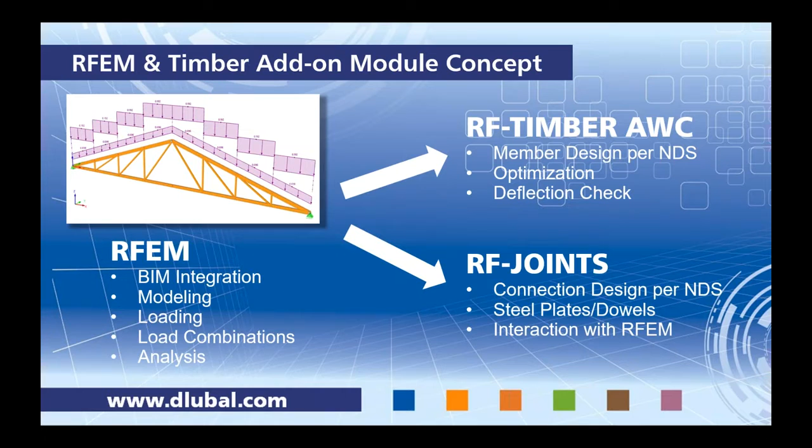The other add-on module, RF Joints, as I mentioned, a new feature was added for the NDS code, both again ASD and LRFD for connection design. It's utilizing steel plates and dowels. And again, I'll show you the interaction that the add-on module can have with RFEM in regards to the actual stiffness properties of a connection and how that affects our internal forces.

So with that said, we can jump directly into the RFEM model. For the sake of time, I did go ahead and create this general truss here, and I am in a 2D environment. So in order to create this truss, I used our structure generator. If we go up to Tools, Generate Model, under Members, you'll notice that we have several options here. A few of them are grayed out, and that's simply because I'm in a 2D environment.

But for this example today, I use the 2D truss option. This dialog pops up. You can see all of the different truss types that we have. We have the option to set our diagonals, different directions, and the rest is pretty self-explanatory. We simply give it the number of bays, the total length. It's a pretty large truss for today, so we set this at 85 feet and the total height at 15 feet.

Then the program asks us to determine the cross sections, to set those cross sections. So for the upper chord and lower chord, I just gave it general glue lam timber members, as well as those specific properties for a glue lam. I can press my little info button here to see the cross-sectional properties, a 6x12 for my upper chord, and for my lower chord, I modeled a 6x10.

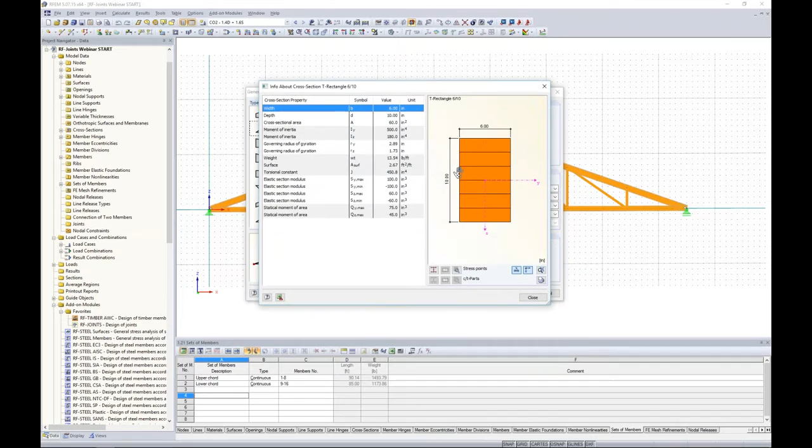For the diagonals and verticals, these are just more post members, 5 inch by 5 inch, Douglas fir larch, so a softwood here. Again, the member properties can be viewed.

Now, the program automatically sets the member type to beam for the upper and lower chords, and you'll notice that the diagonals are set to truss.

For any type of finite element modeling software, we typically have different member types. For our program, beam type is anything that would be a beam or column. A truss would be the same thing as a beam, but we've automatically applied moment end releases to those members. So a truss makes perfect sense for all of our internal members within this truss that we don't want to transfer any moment to our upper and lower chords.

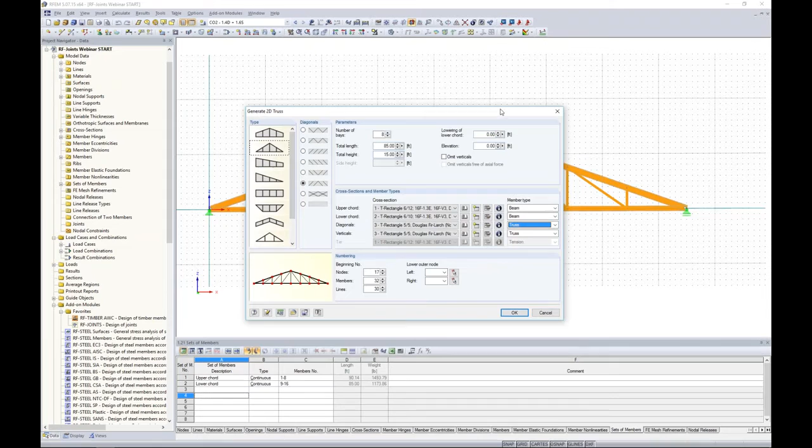So leaving these settings as is for the member type, we press OK, then we'll get the generation of our timber structure here. Then I did add a pin support on my left-hand side and a simple roller support on my right-hand side.

Now, the other thing that we need to take care of is that when I did generate the truss, a fully rigid connection was available at the top of the truss, also on the left and the right.

So you'll notice that I've applied a simple pinned member end release for the top of my truss, just one of the members. You can do so by editing the member, double-clicking it. You'll notice that we have member hinge at the start and member hinge at the end.

I just created a moment release, which you can see here in the two-dimensional direction about the local y-axis. I did so at the beginning of the member on my left-hand side and the end of my member on my right-hand side. So modeling is essentially complete for this simple timber truss.

I did also apply some loads, and I have two load cases. You'll notice in my drop-down box I have dead load and snow load. So my dead load, if I display it, is just a simple member load, 0.08 kips per foot.

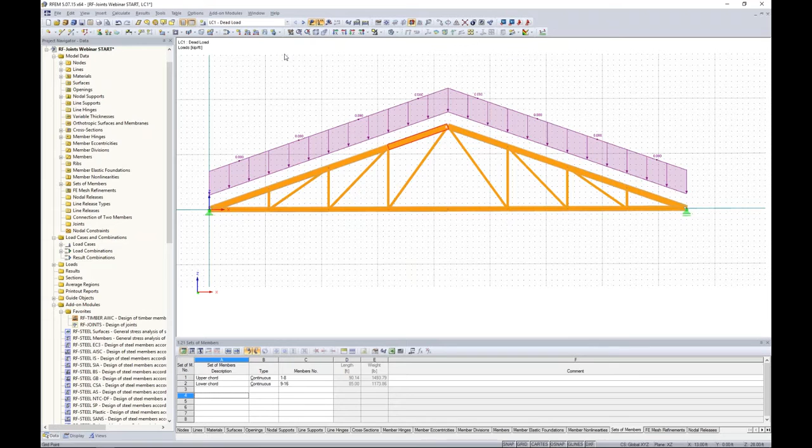The snow load, on the other hand, is 0.12 kips per foot in the projected Z direction. So we're taking into account this member angle and how that load directly applies to these upper chords.

Now I also created a couple of load combinations just manually, and maybe if we enter in the load combinations dialog box we can see this. So we do have the options to automatically create these load combinations, like I mentioned, per ASCE 7 for example.

But for the simplicity of today's example, I created two load combinations. The first could be considered an ASD load combination where my load factors are 1.0 for dead load and snow load. My second load combination is maybe an LRFD load combination where I have applied the load factors of 1.4 and 1.6.

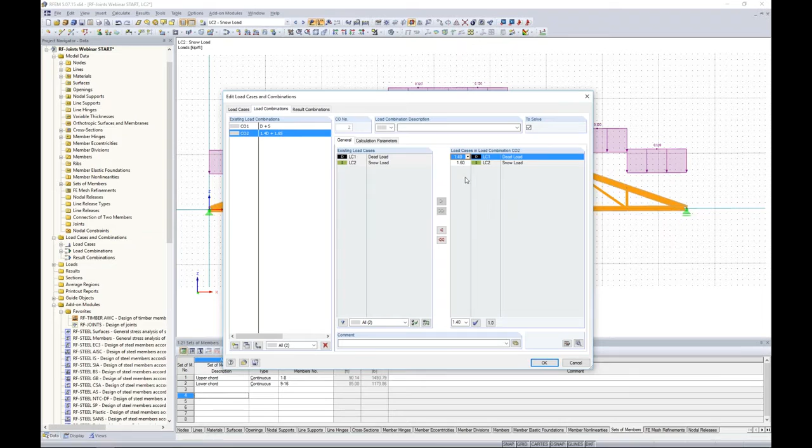You can see in this drop-down box we have quick access to them, or we can overwrite them with whatever load factor we would like.

So now you have the ability to toggle between the load cases and load combinations, and we can run our first analysis. I can go to calculate all, and we'll see within a split second the model will be solved.

So we are still in RFEM. We haven't touched any of the add-on modules yet. So once we run this analysis, in our project navigator over here, we have the results tab available.

And we can, for example, view everything graphically such as global deformations. We can change the display factors here.

What may be a little bit more interesting is to take a look at our member internal forces. Here you can see we have our axial forces. We have some pretty high tension forces on the bottom. We have high compression forces at the top, denoted by the negative magnitude sign here.

Taking a look at shear forces, I can always increase my member diagrams here. And lastly, we have our moments. We should have no moment transfer where I put in those moment hinges, as well as along our diagonals and verticals here. Same thing for support reactions.

These are controlled here graphically within our results in the project navigator dialog box. And you have full control over colors, sizes of fonts just by going to Options, Display Properties.

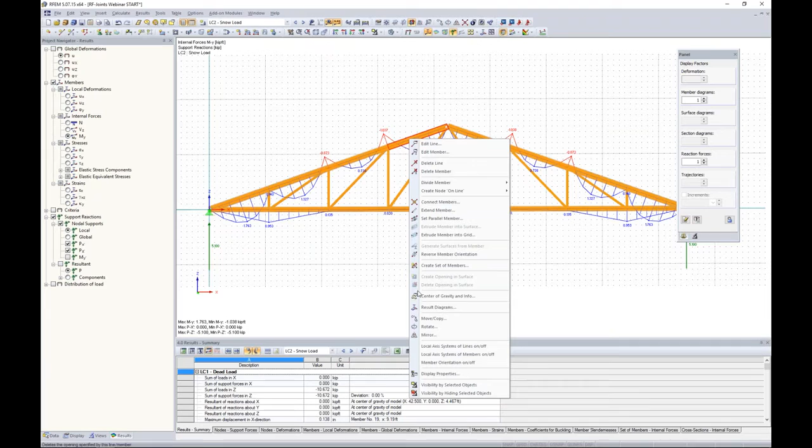Now, this is great graphically, but sometimes we want to see a little bit more information as it relates to the member. So we can always right-click on a specific member and choose Results Diagram.

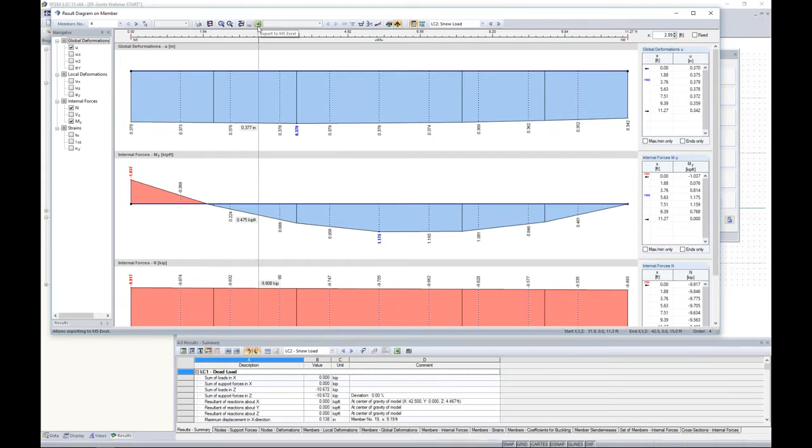Now you'll see the entire member here. We can turn on more graphs such as internal forces, deflections, and get a more realistic view of what's going on along the length of the member. You can print this off directly to a printout report, or export directly to Excel for further sorting. So a lot of powerful capabilities in just viewing our analysis alone.

Now that we have run a full analysis, typically as design engineers we want to move on to code checks. This is where we make the clear distinction that we're going to utilize an add-on module. In the data navigator, you'll see a long list of add-on modules. We work in the add-on module system because we want to cater the software to your needs. Not everybody is going to be doing Chinese steel design, for example, so why should you pay for it? We're trying to cater towards your specific design needs. We also have them organized better with this add-on modules drop-down at the top, according to different materials and applications, dynamic analysis, and things like that.

So for today, we will launch the RF Timber AWC. To begin with, you'll notice we have both ASD and LRFD, so that's nice. Some other software programs for timber design only give you ASD, so you have complete control over which design method you would like to run. Today, we will choose the LRFD.

For the ultimate limit state design, my load combinations and cases were brought in from RFEM, so I don't need to redefine any of that. For ultimate limit state, we'll choose our LRFD load combination, and for serviceability, we will choose our ASD load combination.

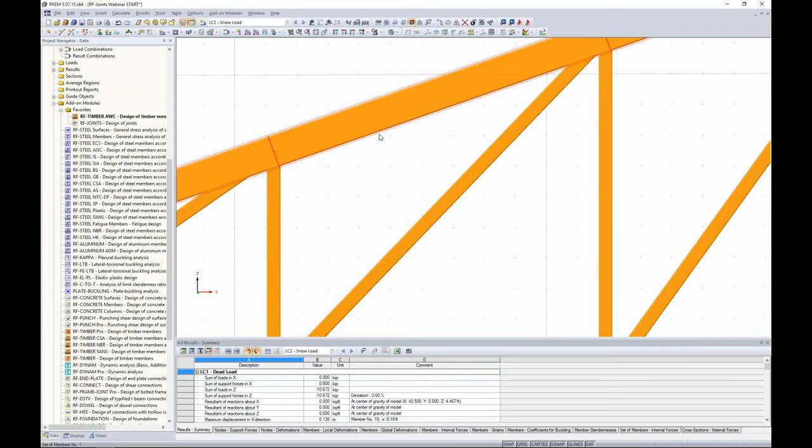I know that's hard for you guys to see, but if you were in the software, you'd be able to hover over that and see it's a set of members. A set of members will essentially be designed like a continuous beam - we don't want to optimize one of these individual members different from its adjacent members. We want to get a code check for this entire bottom chord. That's where sets of members comes into play.

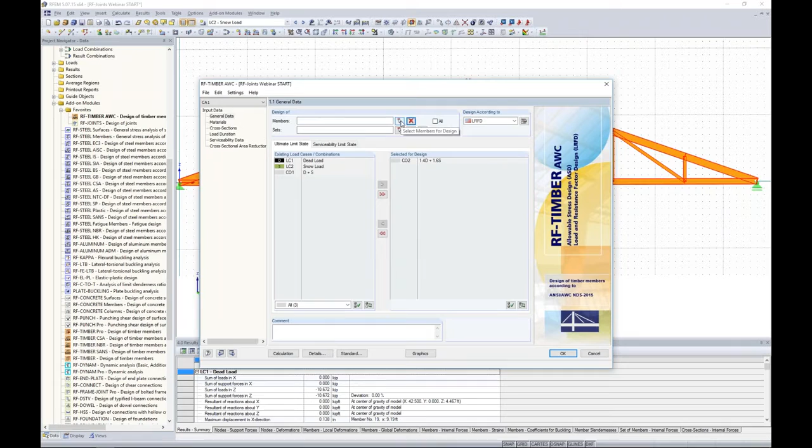Now the default is to select all members. I'm going to clear this, and for my member design, I'll use my selection dialog box, similar to what you'd find in AutoCAD, to select all of my internal diagonals and verticals for my member design. And for my sets of members, I simply choose graphically the upper chord and the lower chord, and click OK. So now we have the distinction between members and sets of members for design purposes.

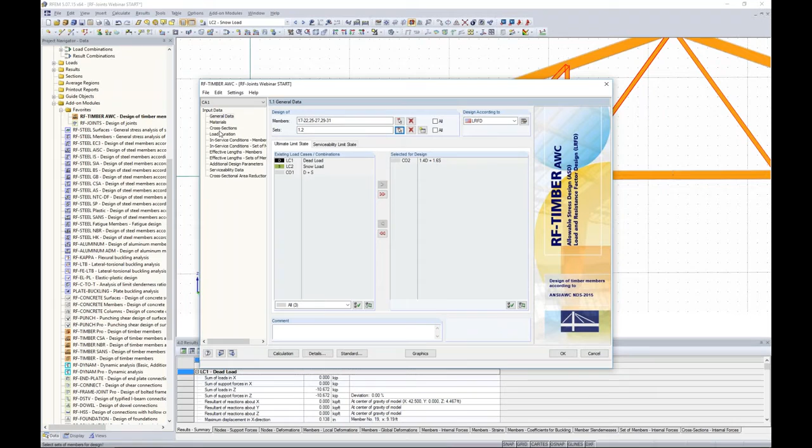Now all I need to do is simply move down the list. Next we will go to materials. Again, everything is brought in from RFEM, so I don't have to redefine my materials, my geometry, my cross sections. All we're doing in this add-on module is giving some further design information related directly to the NDS code.

Now you'll notice we have two bright red materials here, and that's just because when I open up a new model, concrete and steel are defaults within the program. I can delete these back in RFEM if I wanted to, but all the program is telling me is that these are not applicable in the Timber add-on module. That makes sense. But our two materials that we did define to our members back in RFEM are applicable. I can click them and view all of the material properties that will go into the design of this member.

Again, cross-sections, same concept. The member cross-sections are brought in from RFEM. I can view some of the cross-sectional properties here if I'm interested in them.

We can move on to load duration. This is load duration factors. We assign dead load and snow load to the applicable loads that I applied in RFEM. The program is smart enough to know what load duration factors to apply to this.

We can always use our drop-down box to adjust these, but even more so, there is the standards button down at the bottom of the dialog box. It will show you every single factor going into the design process within this add-on module, for example the load duration factors. What's nice is that you can adjust these if you don't fall between 10 years and 2 months, but somewhere in between. That's completely up to you.

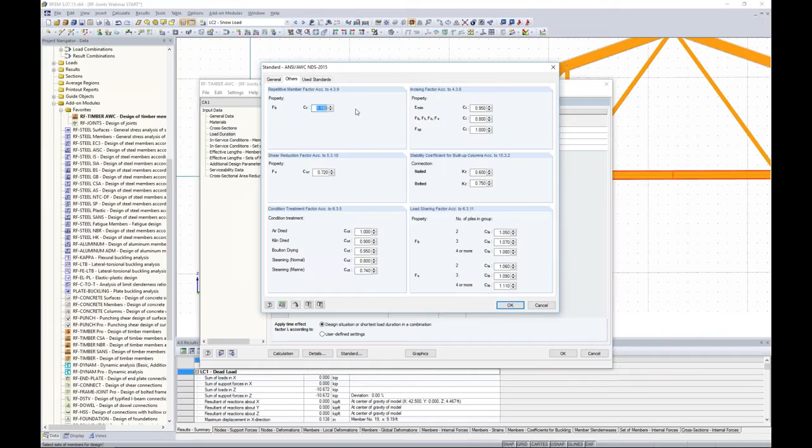Then you'll notice some of the other factors such as temperature factor, wet service factor. If we go to the others tab, repetitive member, shear reduction factors - again this is just all the information from the code. Under used standards, we list which standards are being utilized for the design, and at the end we give you references to these standards as well.

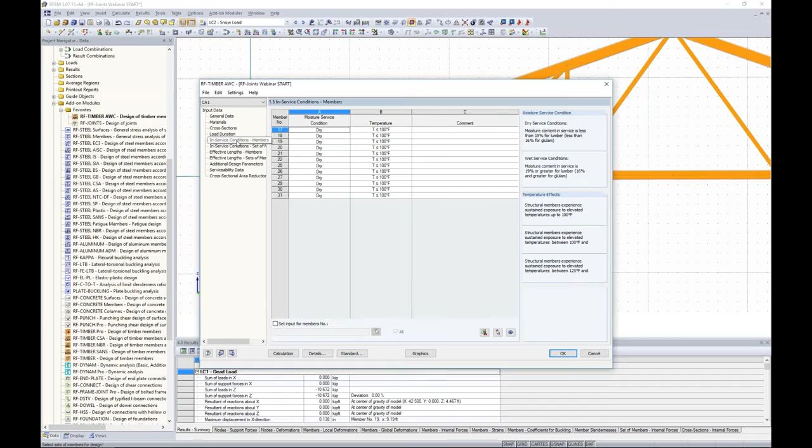Moving down the list to in-service conditions - again this comes from our standards button - moisture service conditions. Are the members dry or wet? Our temperature ranges, we can change these if we'd like.

You'll notice that we have two separate tables for members versus sets of members. This is just so we don't group everything together. I think it's laid out a little nicer when we separate members versus sets of members, and then we can control those factors individually.

Effective lengths for members - this is stability checks. You'll notice we have buckling about the weak axis, buckling about the strong axis, and lateral torsional buckling. I'm going to assume for all my internal diagonals and verticals that buckling about the strong and weak axis, as well as lateral torsional buckling, is a concern. So I'll leave everything as is and let the program determine if this is okay based on my design.

Now the effective lengths here default to the full member length, but you can easily control these lengths by typing it in or graphically using the measuring tool, so you have complete control over this.

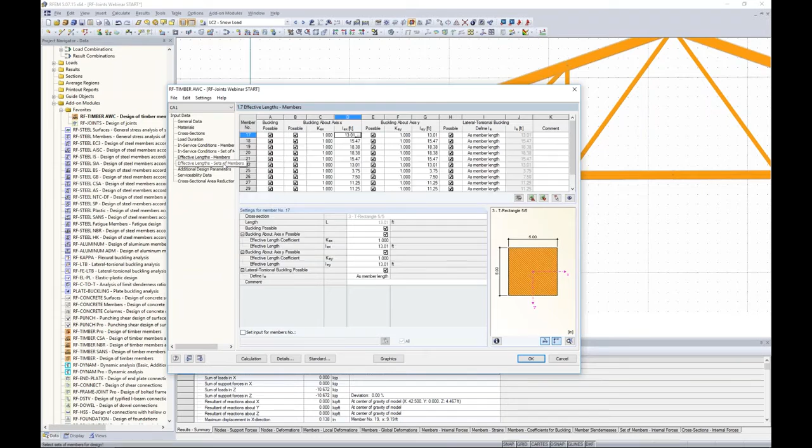Again, our sets of members is on a separate table. For my upper and lower chord, I'm going to assume I have complete lateral bracing along the length of the member. So weak axis buckling about the local x-axis, which I have my axes shown down here, is not a concern to me. And it would be the same for my lateral torsional buckling - this is not a concern based on my connections or lateral bracings.

All I have to do is simply uncheck the possible buckling about the y-axis or strong axis - I am still concerned with this, but right now it's set to the full member length, the full set of member length. So it's pretty large, 90 feet and 85 feet.

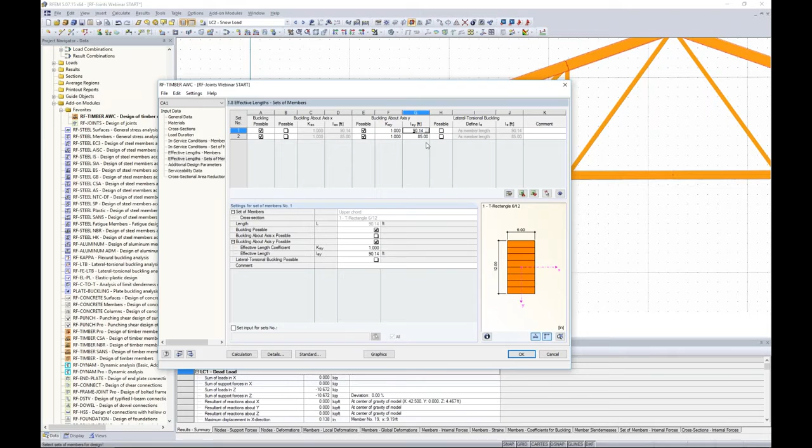Maybe for uplift wind purposes, I have much smaller unbraced lengths here - for example the upper might be 3 feet and the lower might be 3.5 feet. So as a design engineer, you always want to pay careful attention to your unbraced lengths because this significantly affects our stability design.

Moving on to additional design parameters - this is just shear reduction factors, edge bonded. This refers to our glulam members for our upper and lower chord members. We have the code references here, and again the standards button will tell you what those factors are.

If we scroll down a little further, here's our incising factors and repetitive factors for our post or brace members within the truss.

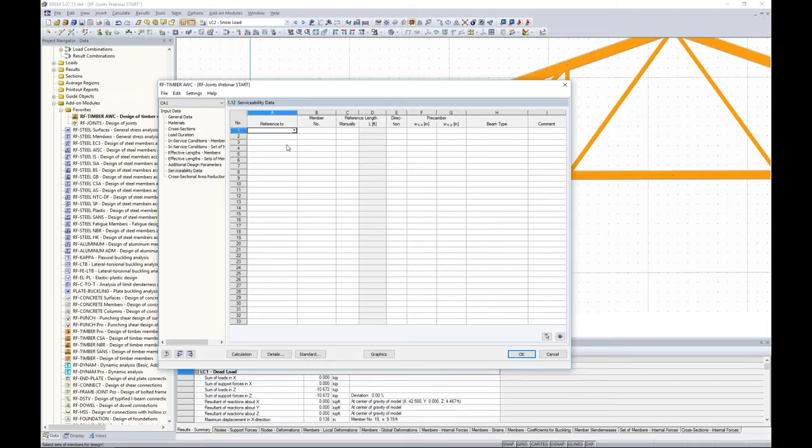We can move on down to the serviceability data - here is just deflection checks. We can check every single member in our model, or maybe we're only concerned with checking a couple of members. For this example, I'll graphically choose perhaps one of my diagonals that I want to check deflections for. I click OK. The manual reference length is set to the full length of the member.

That's fine. Do I have a pre-camber? If so, I could put this in here. And lastly, I need to specify if this is a beam or cantilever. Now I can do the same thing with a set of members - maybe I'm interested in my bottom chord deflection.

All I need to do is graphically select my bottom chord here. The full reference length is set at 85 feet, and again we just use the beam type beam.

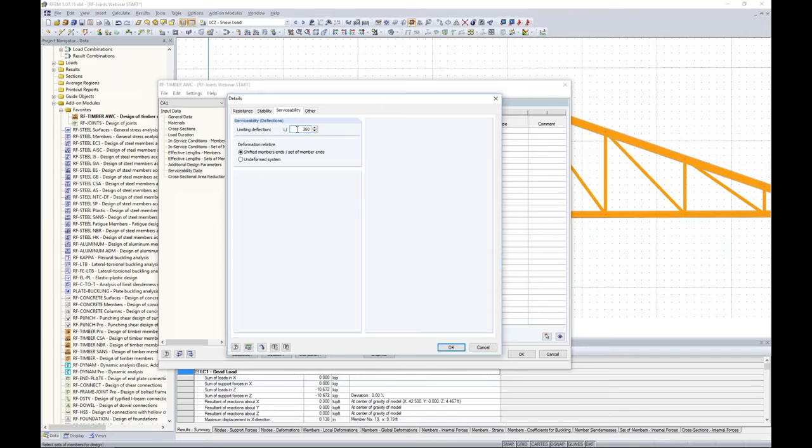Now the question is, what deflection ratios am I comparing this to? Where can I control that? Under the Details tab under Serviceability, here's my limiting deflection ratio. You can see the default is set at L/360. For cantilevers, it will always use half of this ratio that you set here. Then you need to specify whether the deformation is relative to the shifted member ends or the undeformed system, also known as relative versus absolute deformation. So this is where we can control this limiting deflection ratio and change it if we'd like.

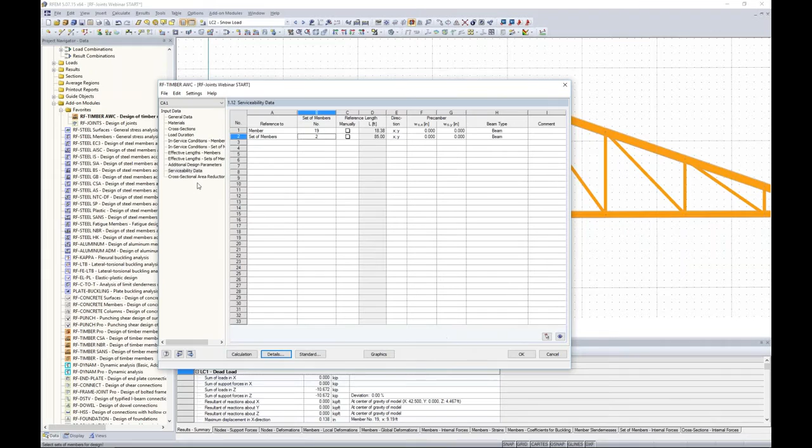Lastly, we can move on to the cross-sectional area reduction. This is if we have a notch within our member, maybe at the member connection at the ends, or maybe the member is sitting on top of a wall or another member, and we have to take this cross-sectional notch out. We can easily account for this by selecting the member graphically, and then giving the notch location, whether that's the start, the end, or within the inner span. Then we give the notch the geometry, and the program will automatically account for that cross-sectional area reduction. It's smart enough to only compare those internal forces at this notch location for design purposes, meaning we don't have to reduce the entire cross-section of our member and get an over-conservative design. Just a nice little additional feature if you have this scenario.

For our case, we won't do that today. Now, before running the calculation, I want to quickly run through the rest of the details tabs, to see exactly what is going on behind the scenes with some of these other options.

The first one under resistance is consideration of connections, the reduction of limit tension stresses. If I check this, what this means is that occasionally we have the weakening of a cross-section at a connection. So I can check this checkbox, select a node, and give the connection length, maybe 6 inches, maybe 1 foot, and I can reduce the stress ratio inside that connection. You can see the default is set to 60% here, and the stress ratio outside the connection can be kept to 100%. So now when we're looking at our design, the program will flag you if at that particular node you're exceeding that 60% stress ratio. Just an easy way to take into account the weakening at a particular connection of your cross sections.

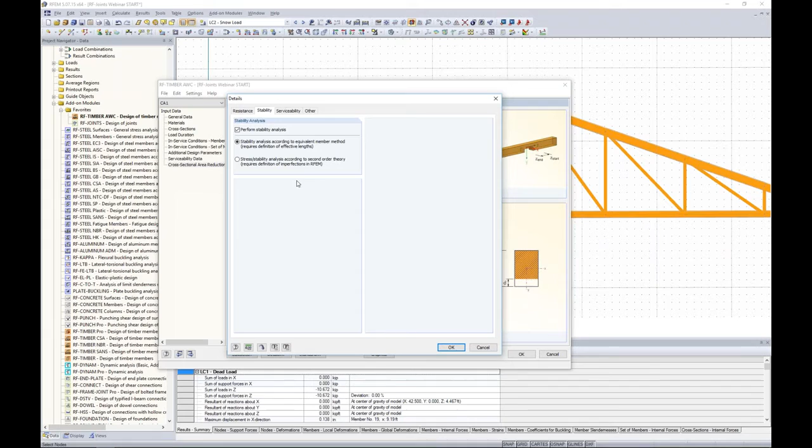And what we're doing is a stability analysis according to the equivalent member method. With the equivalent member method, the NDS says to take into account secondary effects within the design phase for our structure. Now this is very different than something like steel, for example. Steel tells us to take into account secondary effects in the analysis section, so things like P delta, stiffness reductions, notional loads are all taken into account in RFEM, the analysis side. But again, timber's a little bit different in that we have these factors added to our bending capacities, for example.

So with that said, back in RFEM, if I open up my load combinations, you'll notice that under calculation parameters, it is always default in the program to run a second order analysis for our load combinations. This will take into account P big delta and P little delta.

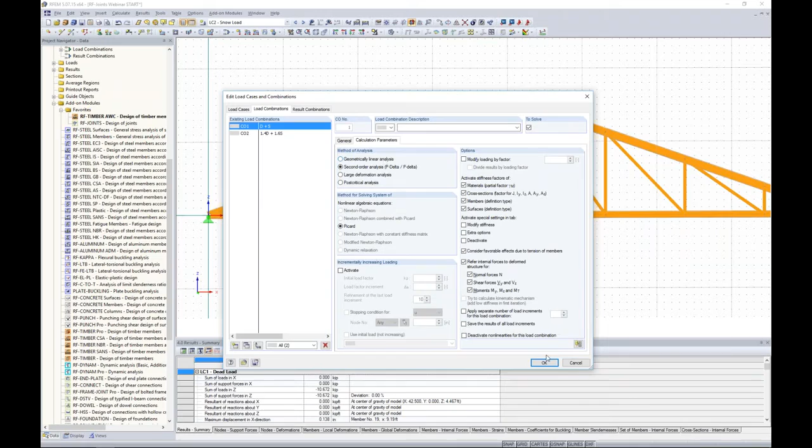So perhaps you have an existing structure, or you're just really close on your design checks and you don't want to increase your member sizes. Technically, you can go back into RFEM, change this to a geometrically linear analysis, and then you can take into account these second order effects within the add-on module only, so the design part of it. Now, it is typical for most engineers just to leave on P delta analysis in RFEM. Therefore, your internal forces are a little bit higher, but it's just a more conservative route to take.

Now, the other option within here is stress stability analysis according to second order theory. It requires definition of imperfections in RFEM. If I were to check this, what I'm doing is telling the program that under the effective lengths, the buckling for strong and weak axis, I'll take that into account with the analysis—maybe with stiffness reductions or with those notional loads, imperfections, things like that. With lateral torsional buckling, there is no way to take that into account with the analysis side, so I'd like to still do a check with that within the design side.

Regardless, today we will stick with the default of checking our strong and weak axis buckling. Serviceability we've already been through, and on the other tab, cross-section optimization: design ratios are maybe more around 0.8, possibly 0.9—it's typically not 1.0. So for optimization for your members, which I'll show you in just a second, you can change this to 0.8, for example, for design purposes.

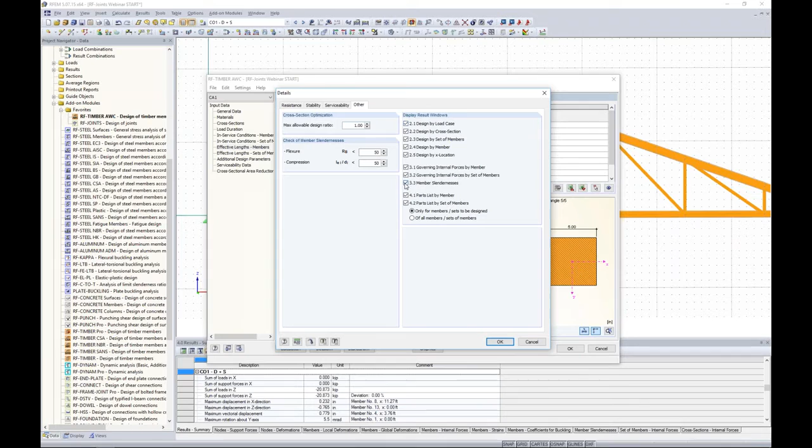Check of member slenderness: if member slenderness is a concern, here are the ratios that we have set according to the code for flexure members and compression members. You will need to activate 3.3 member slenderness right here for our result windows if you are wanting to check for member slenderness. So that's pretty much the concept for all of the input data, and now we're ready to run our first calculation.

You can see that it solves within a quick second. All it's doing is bringing the internal forces into this add-on module from RFEM, and we apply the NDS code for our design. Now we have our results tables available, and we can view the design by load case.

We can view design by cross-section—we have 3 different cross-sections here. Maybe we want to view design by the sets of members or by each individual member. Now, what's also great is that as I'm clicking through these tables, you'll notice that it is synced to the graphics view in RFEM. Even the X location of my controlling internal forces line up with my tables here.

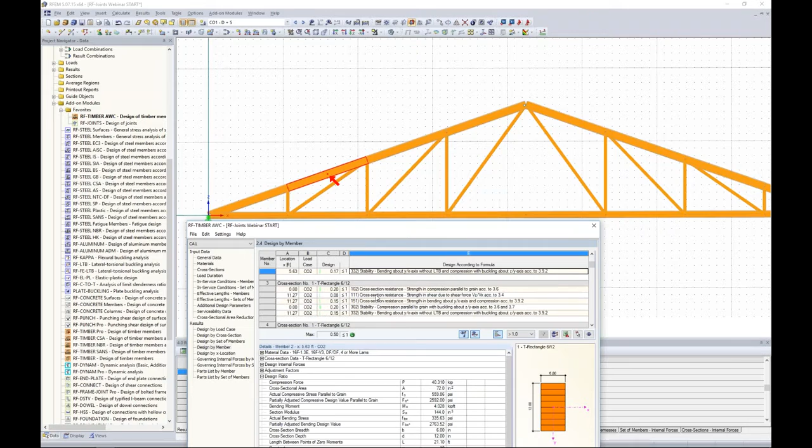And something else that I really pride ourselves on, because I know this isn't available in a lot of other software, is that we give you the code check for everything within the NDS. So we're not just giving you the controlling code check for each member, but you can actually scroll through and view the different checks individually. Even more so, we give you all of the variables that go into that code check, as well as the equation references. So if you have the NDS code right in front of you, here's the equation for your C sub P factor—you can quickly flip to it and understand where those numbers are coming from. So again, a very powerful feature.

Now you can always export directly to Excel to do some further sorting, and as you can see, we have this nice big green smiley face because our design check is only at 0.5. So looks like we're doing quite well with our design. We can also view some of the governing internal forces by member if you are interested in that.

And lastly, we have a parts list by member or a material takeoff. So as far as optimization goes, let's quickly go back to our cross sections table, where you'll notice that the max design ratio for each cross-section is given.

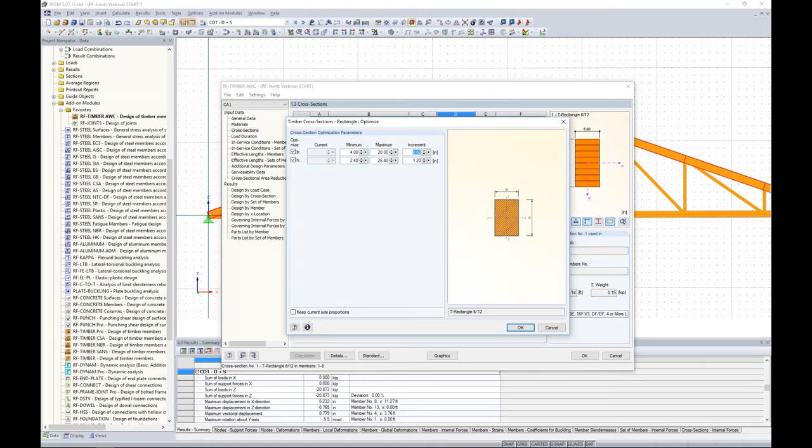I think we can see that our top chord is pretty low, 0.22, so maybe this isn't an ideal cross-section, and rather we'd like to optimize to something more like 0.8. We control that 0.8 under our details setting, where we can choose the option to optimize. When I click yes, I just need to give the program some dimension ranges for both my depth and my height, like maybe 4 inches to 20 inches with an increment of 0.5 inches. Then we can rerun the calculation, the program will optimize, and we can continue on using these new section sizes.

For connection purposes, I'm not going to do this, so we'll just stick with the design that we're given.

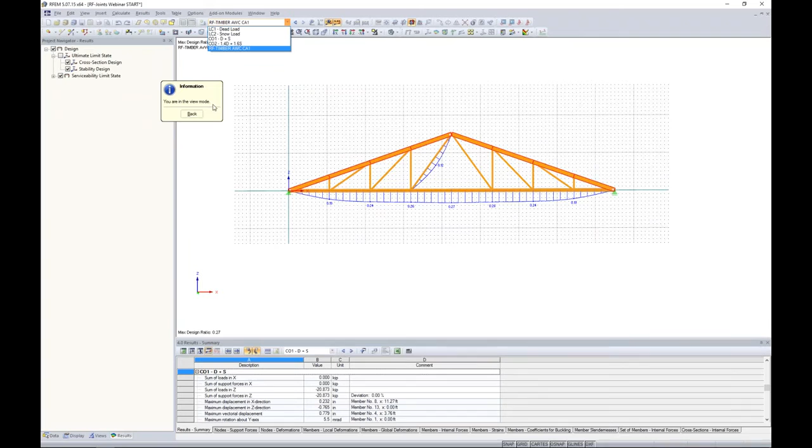Lastly, we can view everything graphically. We're back in RFEM, but we're still technically in the add-on module, which you can see from the drop-down box and this little dialog box here—we're still in RF Timber AWC. So I can view my ultimate limit state designs graphically, and I can turn on my panel, well below 1.0, and we can print these off. Serviceability we can take a look at as well. Remember, we only check serviceability deflections for our set of members down at the bottom and one single member here. So graphically, we can view everything rather than just the tables.

So that basically sums up the member design. And the next thing that we want to move on to is connection design.

So I can go back to my data tab, and I have my other add-on module here, RF Joints, and I will launch that. Again, just another simple dialog box, which is the add-on module, taking in all the internal forces into this add-on module. We just need to further specify some information.

You'll notice that we do have steel and timber. Unfortunately, at the moment, steel is only per Eurocode design, but at some point in the future we do plan to add AISC as well as CSA steel connections. But what is exciting is that we did add the NDS 2015 for our timber connections. You can see we have both ASD and LRFD available. Maybe to just continue on from our member design, we will stick with LRFD design. We have steel to timber connections.

Now for the joint categories, we either have general dowels we can choose from, or you can also see that we have bolts. For today, we will be going with general dowels. Now, there are 3 different joint types. We have the first joint type, which is main member only—maybe you have the cantilever of a beam from a wall, for example. That would be applicable for this type of connection.

The second connection type would be with a continuous member and a second member framing in—something more like this connection here where we have our continuous upper chord and a vertical member framing into that continuous member. And lastly, we have without continuous member. So at this particular connection joint, we don't have any continuous members that we're wanting to define. This is what we'll be continuing on with today.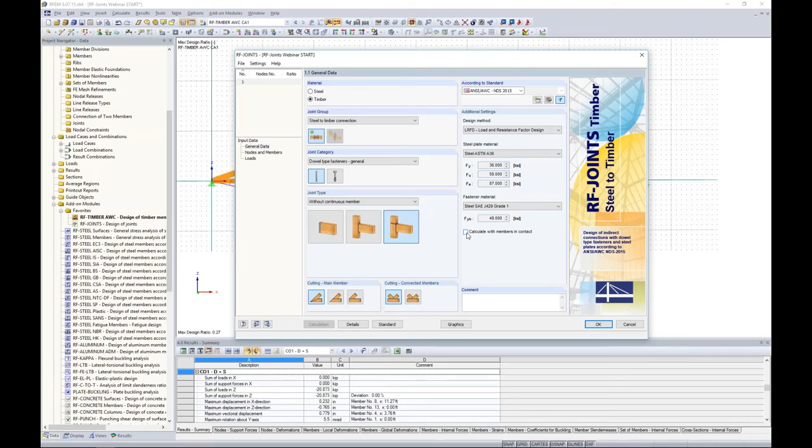We don't give you design for these members in contact, but it's just an additional check to notify you if we do have some extremely high pressures from one member to another. Again, we just simply work down our list here.

We'll move on to nodes and members. In our graphics view you will see our truss, brought in from RFEM, and nothing's highlighted right now since we haven't selected any nodes. This is import from the structural model, or we can set manually here. If we choose set manually, this allows us to define any type of connection we want, including materials, cross sections, and different angles, so we don't have to use what we modeled in RFEM.

For today, it makes more sense to import what we've already modeled in RFEM, so we can do further connection design here. The first thing I want to do is choose my nodes for my first connection. I'm going to choose node number 1 on my left and node number 2 on my right. These will be identical connection designs, so we'll use those.

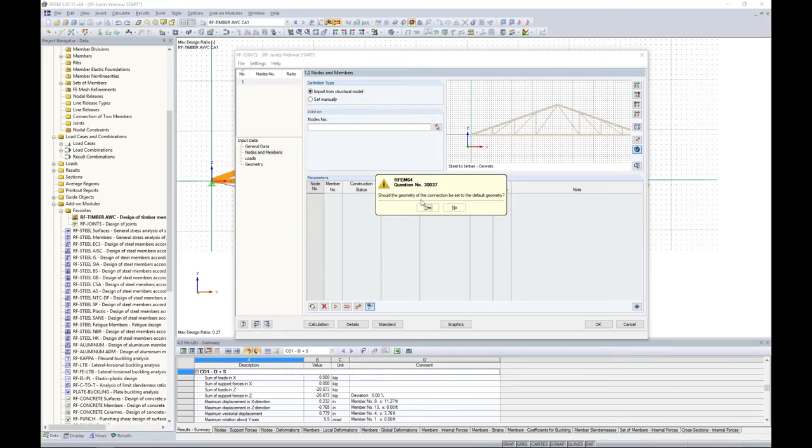Should the geometry of the connections be set to the default geometry? Yes, I want to bring in what RFEM already has modeled. Now you can see I can zoom in here and my members are highlighted at that particular connection. At node number 1, the program automatically assigned the connected member to member number 1. If I use my drop down, I have connected member, main member, inactive. Member number 9 at the bottom is set to the main member. My materials and cross sections were automatically brought in from RFEM, and even my angles were automatically determined, so I don't have to worry about redefining that information.

Quickly jumping to geometry, our picture of our connection will be populated here, and I think we're all in agreement that this is not the ideal connection. Nobody would cut these two members right down the middle and create a connection looking like this. So how do we change this?

Back on the General Data tab, this is where the cutting of the main member and connected members are affected. I'm going to change this to the second option, which you can see here graphically. Jumping back to my geometry tab, this is looking a little bit better. But ideally, all of these internal forces from our upper chord are going to be bearing down on our bottom chord. Timber is not very strong when we're considering these internal forces bearing down here, so I want to flip-flop these, so to speak.

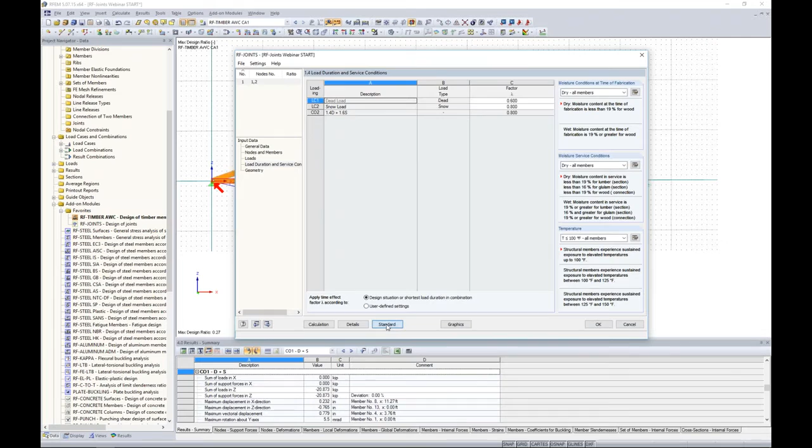Again, if we pop open this standard, here is where we can see all of the different factors that are applied for the connection design. We can scroll through these. Everything's coming directly from the NDS code.

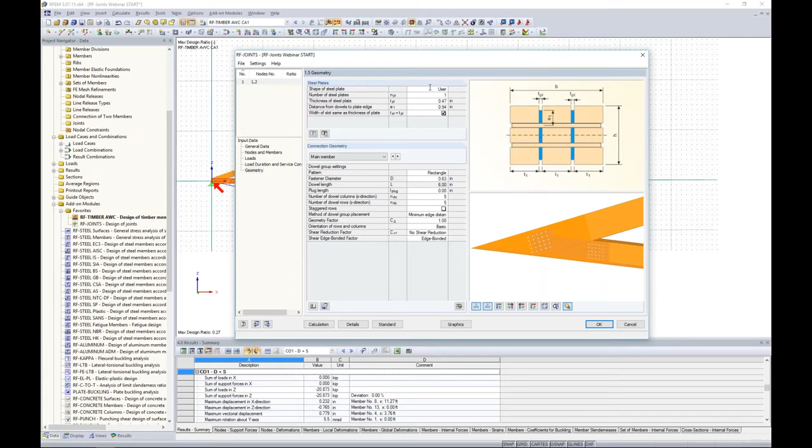Lastly, moving on to geometry. This is probably the most important, because here is where we are going to define our dowel layout and our steel plate layout. It's pretty self-explanatory. All I need to do is work from top to bottom, filling out each variable here. The shape of the steel plate, the first option is user-defined, which you can see is basic, just rectangular sections at my upper chord and my lower chord.

The second option is convex hull. What the program will do is make the best attempt it can to simply connect these two rectangles with a straight line. So maybe this is something a little bit more similar to what we'd see actually fabricated. So that's an option if you'd like.

The third option is rectangle. You can see this is not ideal for our connection today, but this could be ideal for another scenario. We'll just stick with this user-defined connection for now.

Now, the number of steel plates can vary anywhere between 1 and 5 steel plates. For the first run, we'll stick with 1 steel plate. We do need to give the thickness of the plate. We'll set that to 0.5 inches.

Now the distance from the dowels to the plate edge, E1, we do our best to give you all of these variables graphically as well, so you can understand exactly what information you're entering here. So for that edge distance, we will set that at 1.2.

Now, is the width of the slot the same as the thickness of the plate? Well, if this was not, then I could specify the slot thickness different from the thickness of the plate if I'd like. Moving on to the connection geometry, you can see that we have the main member here, or we have connected members.

So we first want to start with our main member. The pattern will always be rectangular. The fastener diameter, which we can change our viewport here and zoom in to see exactly what we're setting in terms of our dowel layout, we will set our fastener diameter to 0.5 inches.

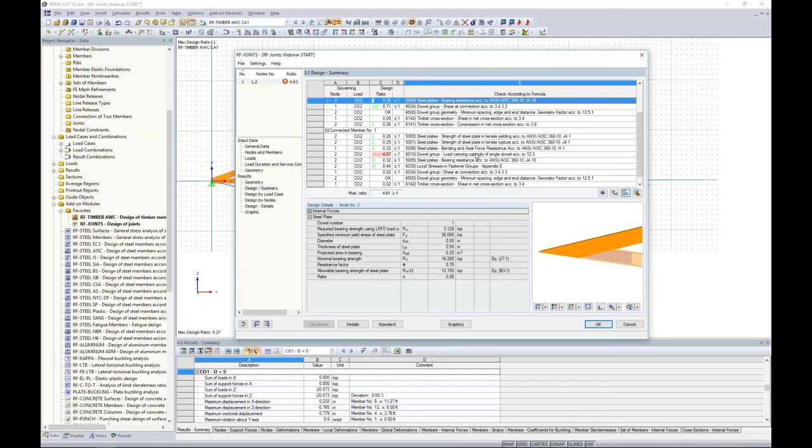Scrolling down to my connected member, I obviously have a huge problem here as well. My load carrying capacity of a single dowel is exceeded.

So before checking out the rest of the results, let's go back to our geometry and make some changes here. Maybe the first change I'd like to make is adding an extra steel plate. It's asking me if I want to delete my results.

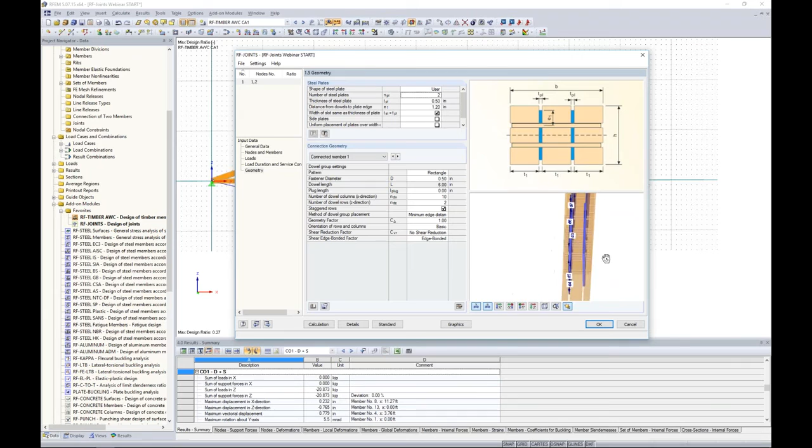Yes, this is fine. Now I can rotate this view around, and you can see that these steel plates are shown here graphically quite nicely. It's a nice rendered view where we can actually see what's going on.

Now, there are a few other settings that came up with adding 2 steel plates. For example, we can set these as side plates if we wanted. So rather than be embedded within the glulam members, you can see now they are side plates. For us, we will uncheck this option. The third option is uniform placement of plates over the width, which you can see from this cross section here. If I uncheck this, then I can set my distance between the plates, T2, here in the center.

Maybe I want something more like 2 inches, so you have control over that. It doesn't necessarily need to be the same width for all 3 dimensions.

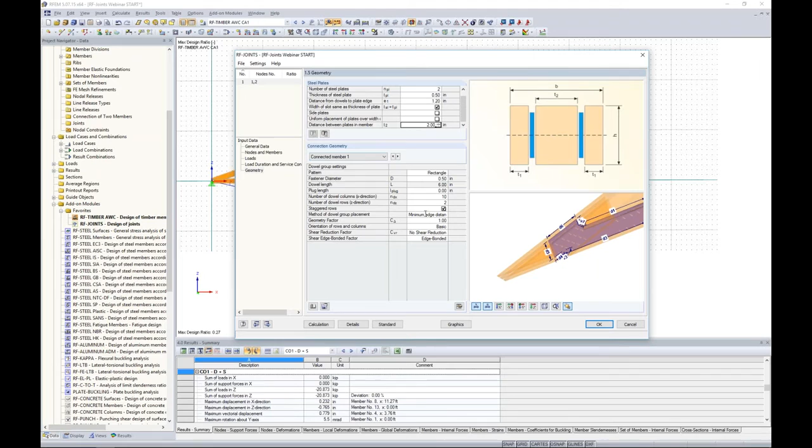Looking at our connected member number 1, I'm going to leave most of this as is except for the method of dowel group placement. Sorry, I want to switch this over to the main member first of all, so we'll scroll in here to our main member.

Now, instead of the minimum edge distance, I'm going to choose a user-defined setting here. So the distance between dowel columns, which you can see everything is shown graphically here for what numbers I'm entering for my variables, perhaps the distance between the dowel columns, we'll set this at 5 inches.

The distance between the rows, we can change this to 2.5 inches. And the distance from the loaded end to the dowel, A3, which you can see here, we will set this to 6 inches.

Eccentricity, if you want to move this connection up or down, you can do so as well with the generation of this eccentricity setting. Now, everything else will leave the same for this main member.

Connected member number 1, remember we're extremely overstressed here. There were pretty high tension forces on this lower chord. So maybe I want to space out these dowels a little bit more to get a little bit more capacity down here at the bottom.

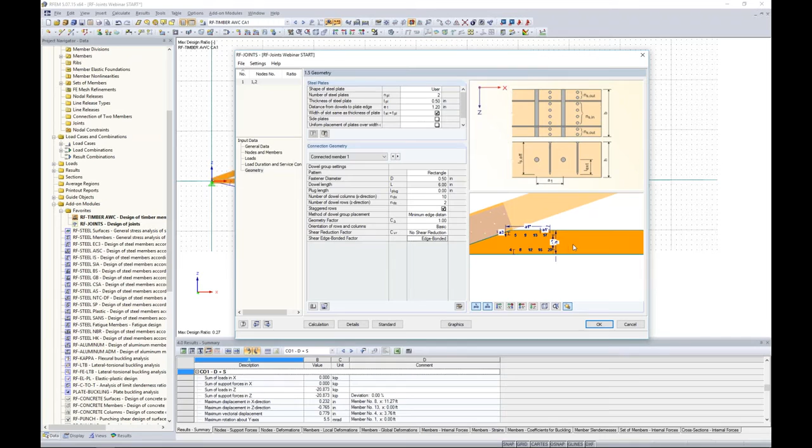Now we did add a second steel plate, so that will help us as well. So instead of the minimum edge distance, I'm going to use these user-defined settings as well. My distance A1 between my dowel columns, I'll set this now to 5.0. And the distance between rows will be 6.0, and the distance to the edge, A3, will now be 6.0 as well.

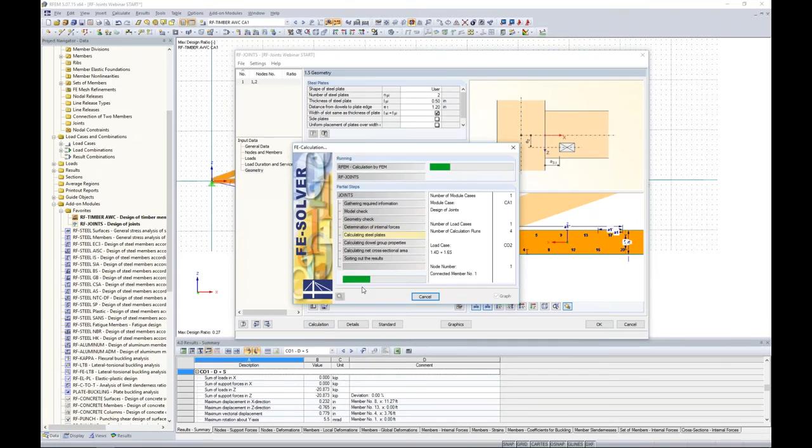No eccentricities. So now that I've made these slight adjustments, we can quickly rerun the calculation with this new geometry to take a look at our results. It looks like we're still slightly overstressed, 1.23. Well, at least we're doing a lot better than the 4 point whatever it was code check from before.

So we're almost there. If I scroll down to my connected member, I'm now at 0.8, my controlling code check here for my load carrying capacity. That's great for design purposes, so I think we're done with that connected member.

But we still want to go back and address the main member quickly. Maybe I don't want to add any additional dowel rows or columns, I'm content with the size of my dowels. So what I can do is simply uncheck my staggered setting.

It's asking if I want to delete my results. Yes, that's fine. So now instead of staggered rows, you'll see that I have a true 8 columns and 4 rows, and so we have a few additional dowels added to this connection.

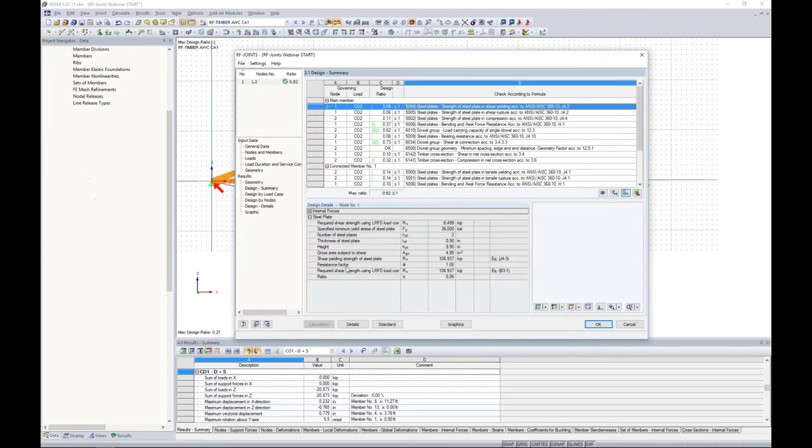We'll run the calculation again, and I think that we'll see now our controlling code check is 0.82. So that is good for design purposes.

So now taking a look at some of the other design tables that we have, designed by load case. We only have one load combination we're solving for, designed by the 2 nodes, node 1 or node 2.

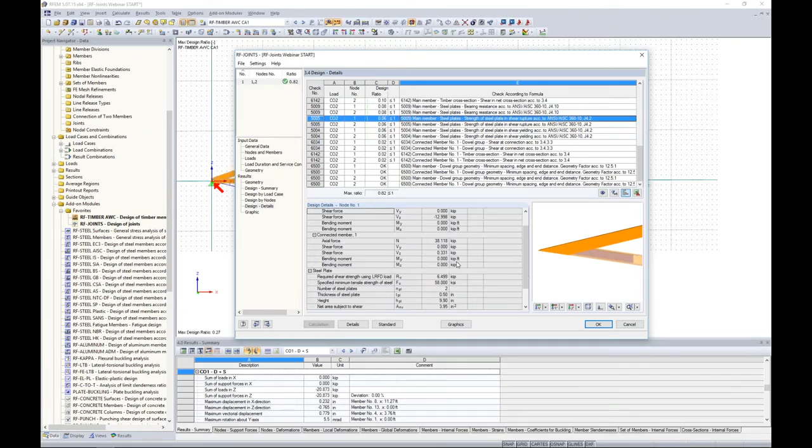Maybe the most user-friendly table would be this design details. Here you can see that the ratio checks are set in descending order from the most controlling to the least controlling, but we also have the checks for minimum edge distances and dowel spacings. Again, everything is as transparent as possible with the code equations and references. Even the internal forces that we're designing for at that particular location are listed.

Our geometry here is just the geometry of the plates. Most of this was in user input, but things like the slip modulus for one fastener, given the slip modulus for the connections, things like that.

Now, our last graphic here is pretty powerful as well. Obviously, we're not a program that's going to give you shop drawings or fabrication drawings for these steel plates, but what we can do is provide you a quick link to create a DXF file for this connection. So you might want to be doing additional drawings in AutoCAD, for example. At the click of a button, you can create that DXF file if you would like to. So again, a pretty powerful feature here for our connection layout.

So that sums up the first connection design, and real quickly we can go to graphics, and the program will automatically bring that connection back into RFEM for the graphic view. We can even rotate our member around and see the dowels and the steel plates in there. So in terms of actual rendering, everything is shown there.

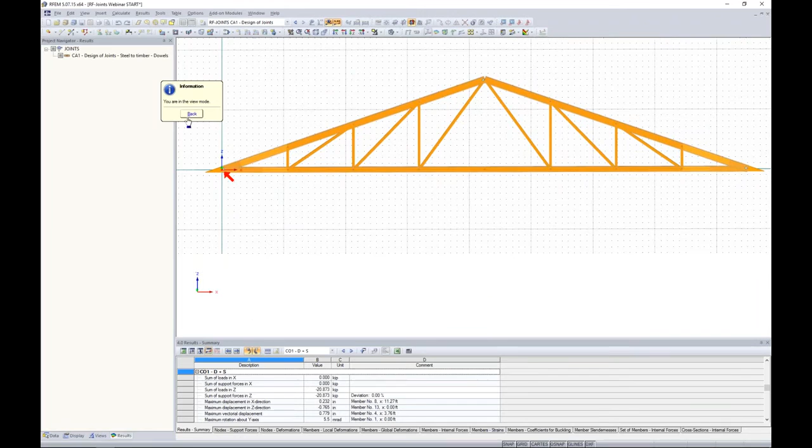Going back to the add-on module, I'm going to do a second connection design pretty quick. So we'll just create a new case here. You can rename it if you'd like. Again, just jumping through some of this user input entry that we've already been through, we'll create without a continuous member. We are doing LRFD design, and everything else we can keep as is.

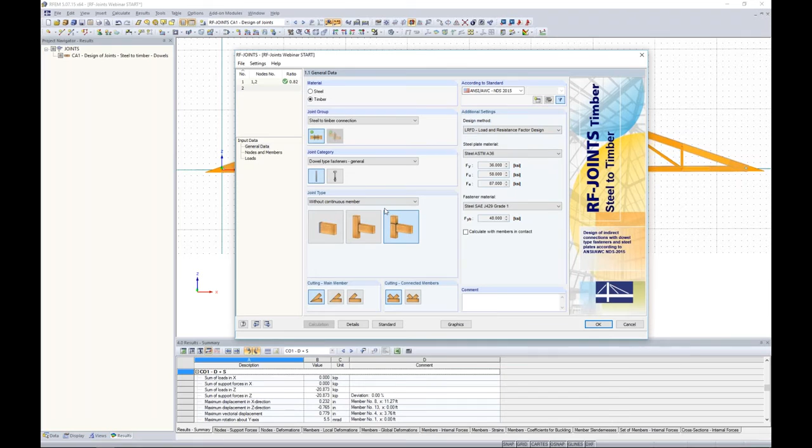The nodes and members for this connection, I'm going to choose the top of my truss, and I click OK. Should the geometry be brought in from RFEM? Yes. Now you can see that we have 4 members for this connection design.

The program automatically assigned the connected members and the main member to the individual members that it brought in from RFEM. So how do we think this connection will look with how the program assigned it? For this, we jump back to our geometry tab and take a look at our connection, and I think we can all agree that this is a pretty big mess. This is certainly not what would be ever created by the contractor, for example.

So we can adjust this back under our nodes and members, and the main member right now is set to this brace. Instead, I'm going to set the main member to my upper chord. Now my brace, I'm going to change this to connected member, and the program has automatically rearranged all of this. We'll jump back to our geometry, and this connection looks much better.

One quick note about this: when you have multiple members, you'll notice that we now have priorities. It looks like the program automatically assigned the correct priorities for now, but let's say the other upper chord here is assigned to priority number 3. Well, again, jumping back to my geometry tab, we have a mess again.

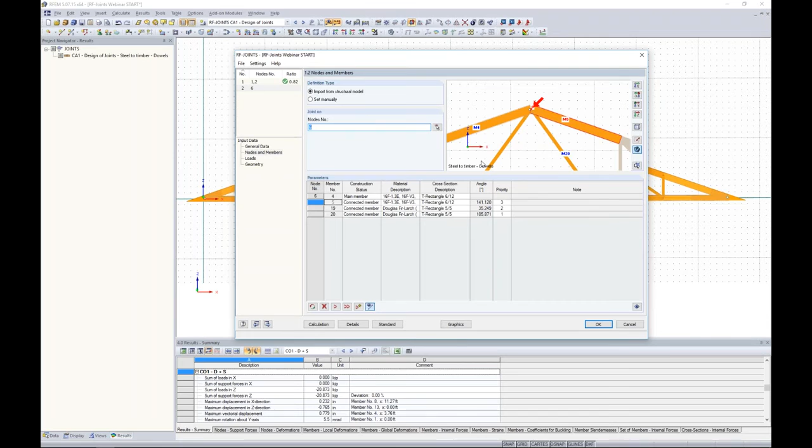So if you're not seeing what you like, you can just make some further adjustments rather than what the program automatically set these members to, whether that's in the nodes and members or under the main member and connected members. Eventually you'll get the connection that you would like, it just may require some adjustments here. So for now, we'll change this back to priority 1, and we should be good to go.

As far as loads, we're choosing our LRFD load combination, the load duration and service conditions. We're not changing anything here. We'll leave this all to default.

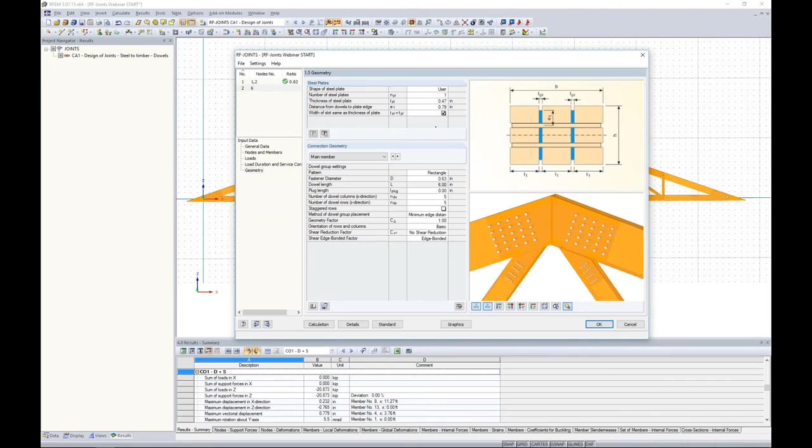So real quickly, since we've been through most of this, we will just fly through some of the user input for our connection data. I'm going to automatically assume we're going to need 2 steel plates here. The thickness of the steel plate will be 0.5 inches. The distance from the dowels to the plate edge will be 1.2.

This dimension here in the middle, I'm going to set this to 2 inches, so it coincides with my connection at the bottom of the truss. My main member here is the first member I'd like to create.

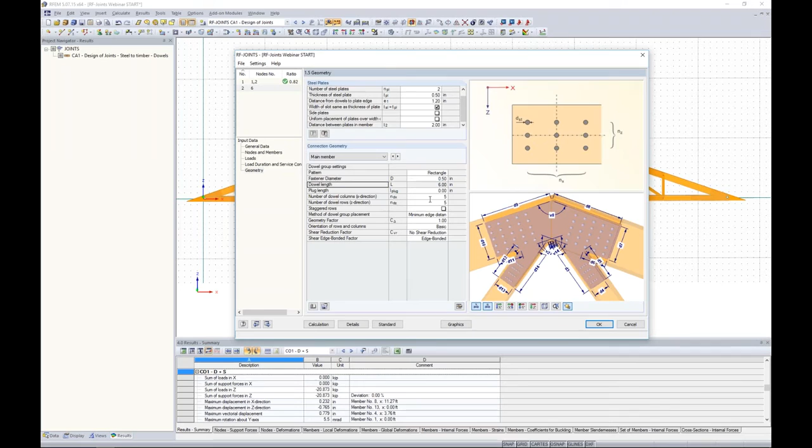The fastener diameter is 0.5 inches. The number of dowel columns I'll set as 8 columns, and 3 rows. I'll utilize a staggered effect here, which we can adjust to view this better.

And I'll just go with the minimum edge distance. Now that I've defined this main member on my upper chord on the left, I probably want to do the same setup for my upper chord on the right. So how do I quickly do this?

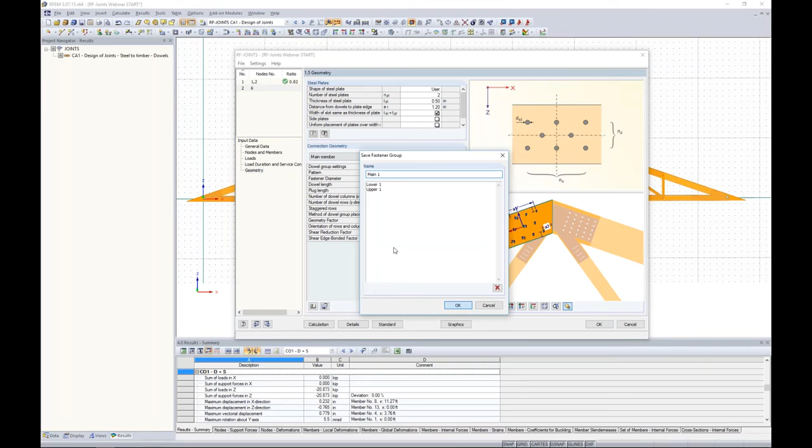This is where we allow you to save the fastener group to the library. I can give it a name such as main 1, click OK. Now I use my dropdown to go to connected member number 1, open up my fastener library, click on main 1, click OK, and everything is updated automatically according to what I just saved.

What's nice is that this fastener library isn't just for this model, but you can save fastener connection layouts between different RFEM models. So it's more efficient than manually redefining this, especially if you're doing a lot of structures with similar layouts. That's a nice feature.

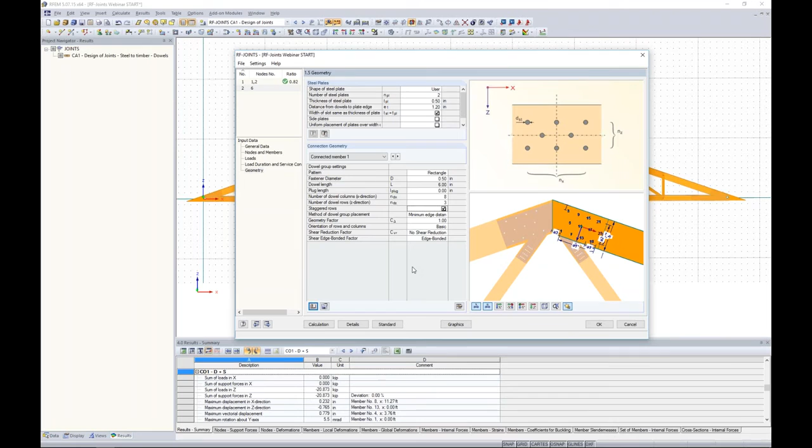Dropping down to the connected member, you can see this is a pretty slim member. So we want to define our settings: 0.5 for the fastener diameter, and for the number of dowel columns we'll set this equal to 6, but with only 1 row. The staggered effect really doesn't matter whether it's checked on or off. The minimum edge distance, we'll leave the same.

You'll see that now we have the option for member eccentricity in the X and Z direction. So if I want to physically move this brace member left, right, up, or down, I can change that by simply adding in that distance. Keep this in mind because I'll show you how to export these eccentricities back into RFEM. For today I'm not going to put any eccentricities in, but just know that's an option if you don't see the layout you'd like.

What's also impressive is that the program automatically knows this is not a glulam member, simply based on the material settings alone. So now we have things like the incising factor, repetitive factor, and size factors for this simple post or brace member that are applicable. You don't have to manually apply these factors; the program knows they automatically have to be assigned according to the NDS code.

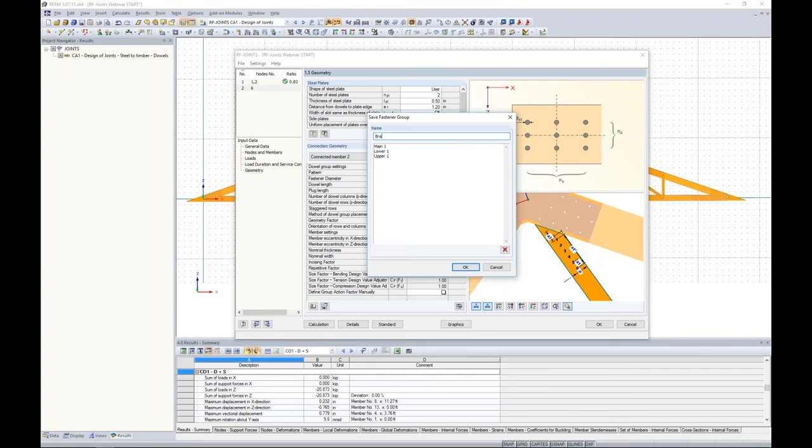We'll leave all of these as default according to our standards button down here. We can save this again, we'll call this one brace 1. Now I drop down to connected member number 3, open up my library, select brace 1, click OK, and everything is automatically updated. Very efficient way to pull up the already defined settings from the other brace.

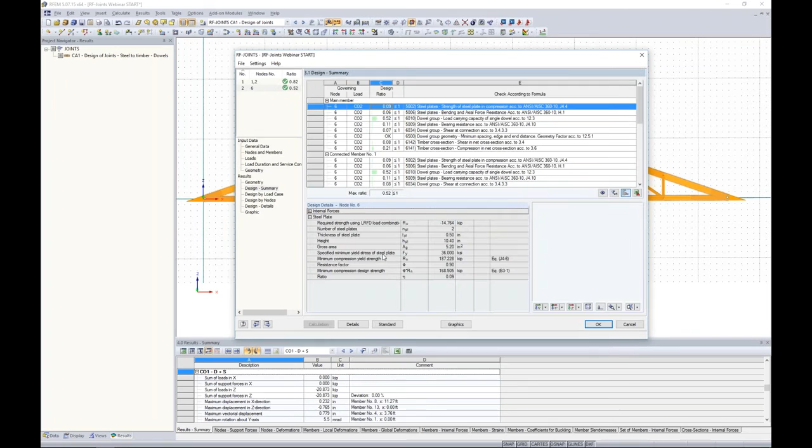Now we're ready to run a calculation, and again it solves rather quickly. You can see that this brace connection went over a little better than the last one. We have a controlling code check of 0.52 here, so everything looks great in terms of that.

Again, we can view everything graphically for this connection. Under the dropdown box, you'll notice we have our first load case for our joint and our second load case. Right now we're in the second load case viewing this connection. I can rotate my view to see these steel plates embedded within my glulam members.

That really is connection design, but the last thing I want to show you is the interaction of RF joints with RFEM. Under the details, we have the option to generate the member eccentricity. Remember with the braces, I told you that you could move that in the global X or Z direction. With this option checked, the program can automatically export little rigid links to move that brace in RFEM, whichever way you specified in RF joints.

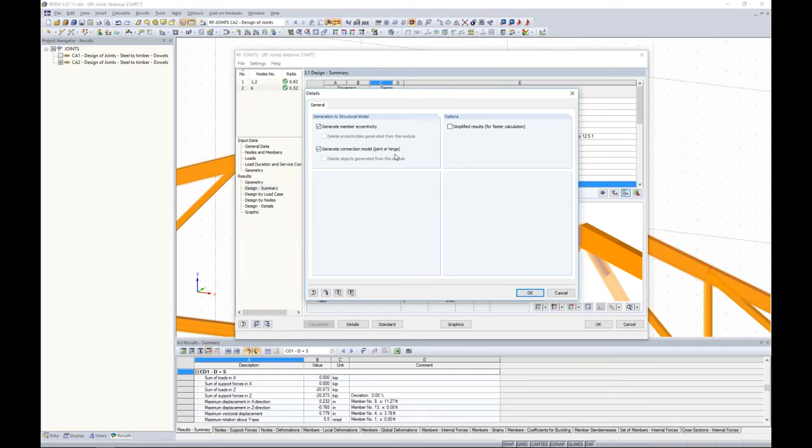Now, I'm not utilizing that today, but what I am going to utilize is the generate connection model of a joint or a hinge. Now, before I do this, there are some prerequisites, and if you don't do this, you will get some simple warnings within the program. So if you do forget this part, the program will remind you.

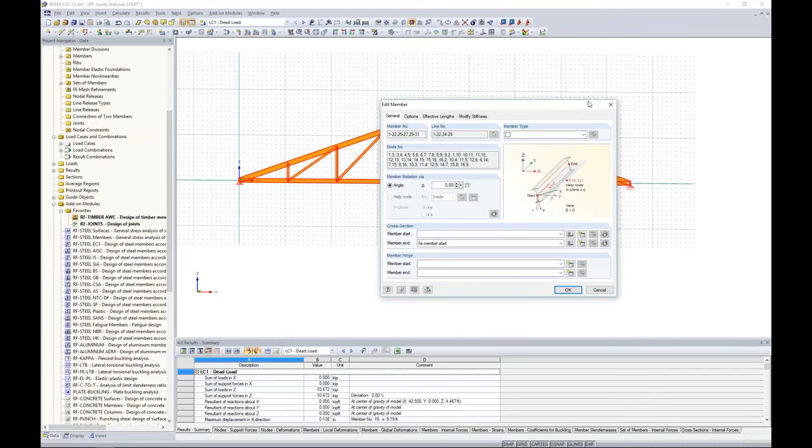But the first thing that I want to do is change this back to RFEM just for simplicity. So I'm no longer in the add-on module, and I'm going to select all of my members here. I'm going to right click, select member and edit. Remember that right now we have some truss members and we have some beam members.

Well, in order to export out my RF-JOINTS settings, all of my members need to be beams. That's just for the simplicity of the program. So that's fine, I'm going to set all of these to beams.

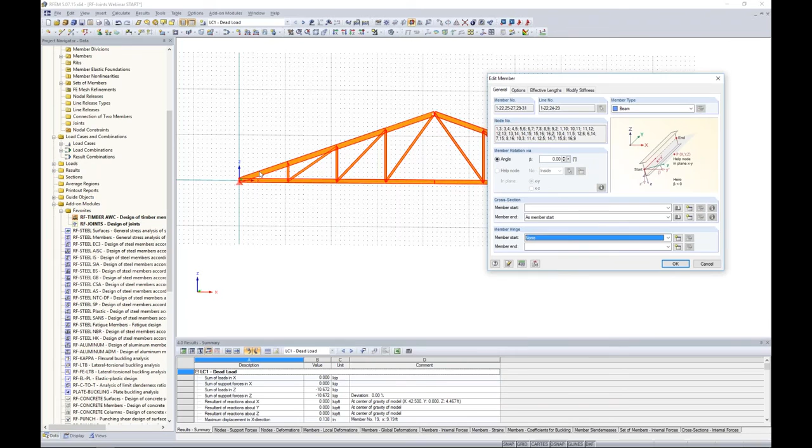Now the other thing I'm going to do is get rid of all of my member hinges. Remember I applied member hinges up at the top here and up at the sides. So now every single member hinge will be set to none, and I click OK.

So we did do connection design at the top here and at the left and the right of the truss, but I did not do connection design, simply for the sake of time, for these other members. So in order to get accurate internal forces, what I need to do is hold down my control key and select all of these members that I did not do connection design for.

I'm going to right click, edit my member again, and for this one I will add back in that moment release at the member ends. This is simply because I don't want moment transfer to my upper and lower chords.

Now for this one I did do a connection design at the top, but at the bottom I didn't. So at the member start I'm going to add back in that moment release, and at the member end for this member I will add back in that moment release.

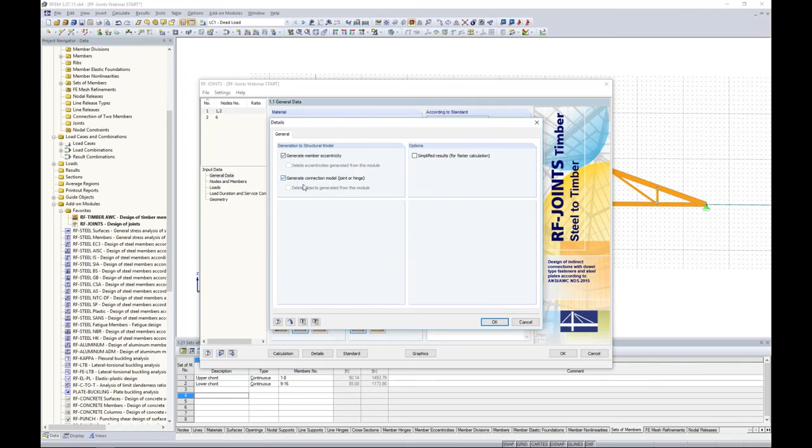So now the model is set up accordingly, and we can jump back into RF-JOINTS. Under the Details tab, we will generate the member eccentricity with the Generate Connection model. I'm going to click OK, click OK, and now we get these funny little looking boxes where my connection designs are. So what exactly is going on here?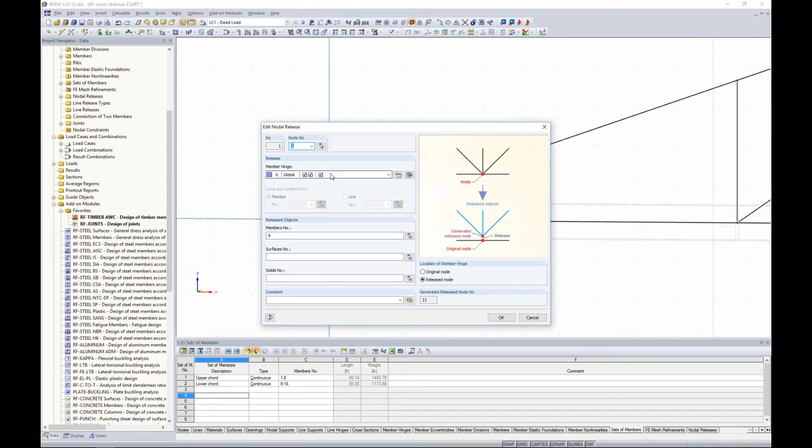Well, I'm going to turn this to wireframe so we can see this a little bit better. Now, the first thing the program's doing, if I double click on this box here, is it's done a complete nodal release. So it has released member 9, my lower member, from this support.

And instead, it's connecting member 9 with a little fictitious rigid link to my upper chord. Now, the significance of the location of this fictitious rigid link is that this is the center of gravity of my steel plate for my upper chord and the center of gravity for the steel plate at my lower chord. So we're actually taking into account the geometry of that connection.

Now, double clicking on one of these other blue boxes, you'll see Edit Joint. So this is what's being exported from RF joints. Here's a nice picture because it can be a little bit overwhelming. We show you the generated member, the rigid member here, and more importantly, the member end releases for this rigid member is a partial fixity.

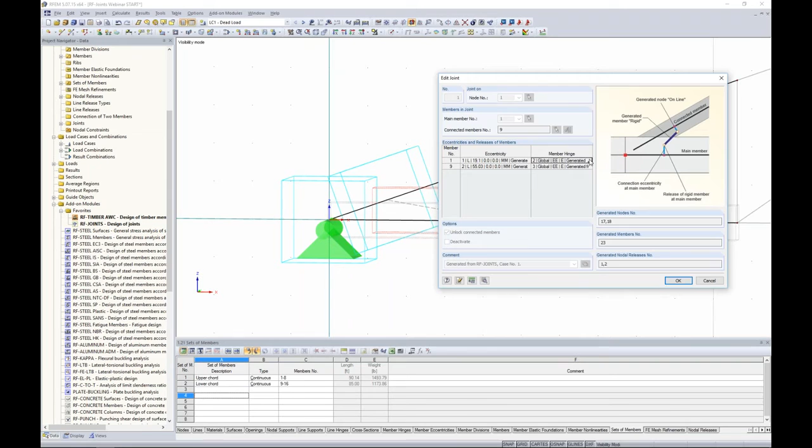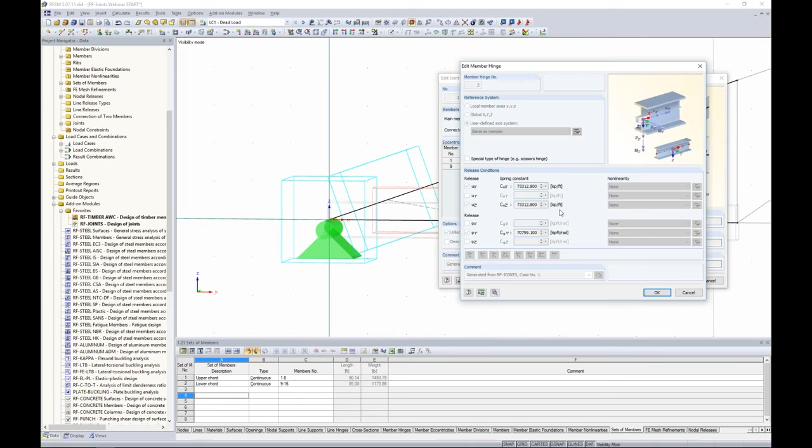And if I take a look at the details here, the partial fixity is based on the stiffnesses exported from RF joints. So the different degrees of freedom are actually calculated based on my true connection in RF joints. So now instead of representing my connection by a single node here with my nodal release, well, now I really have the true connection in the model based on the accurate stiffnesses.

So pretty powerful feature, and I can take a look up here at the top. I now have all of these fictitious rigid links here connected at the center of gravity for all 4 of my steel plates. I can double click and take a look at this joint. Again, I have 4 different member end partial fixities here based on the stiffnesses from the connections brought in from RF joints.

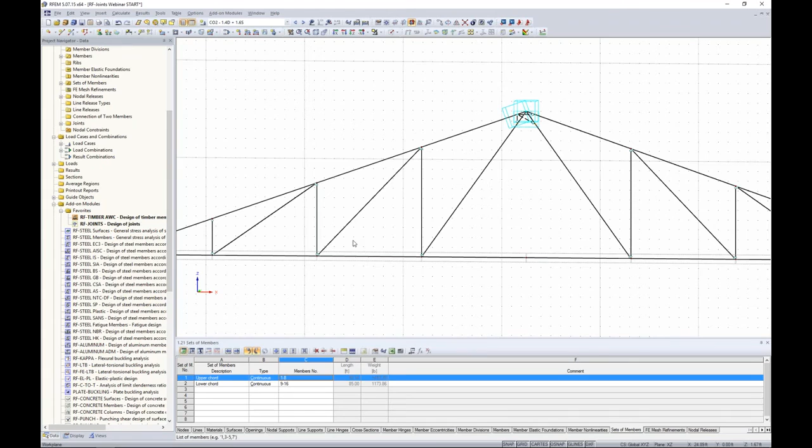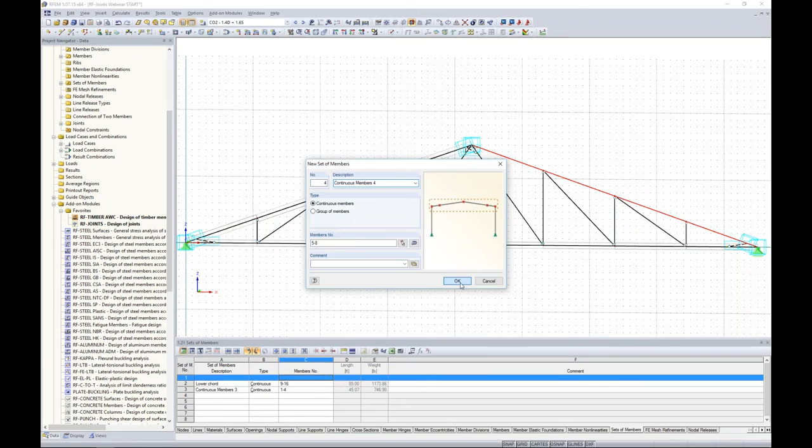One more thing I forgot to mention: sets of members. The set of members was automatically created for our truss generator, but now that we have this nodal release at the top, the set of members for my upper chord is irrelevant — the program gave me an error about that. So I want to redefine my set of members as 2 separate sets. I can right click, create sets of members, 1 continuous member, but I need to create a second set of members by holding down my control key. Now these can still be designed as one continuous member, but because of this joint release at the top from RF Joints, we can't create one set of members for this entire top chord.

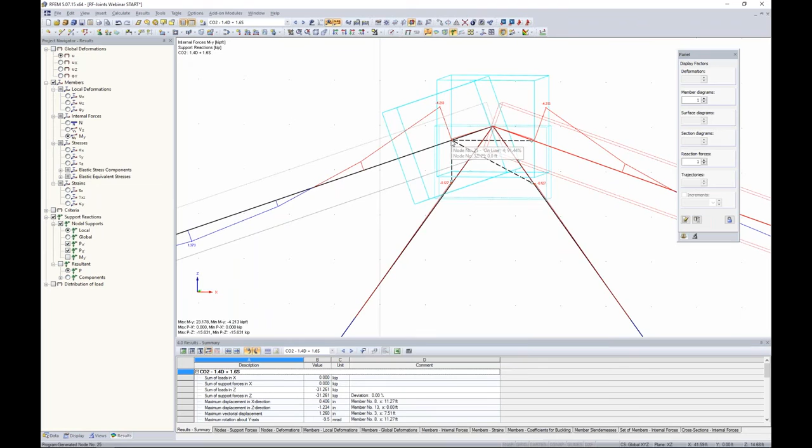Running the analysis again quickly in RFEM, we can take a look at our internal forces. Now you'll notice the program uses these internal forces at the center of gravity at that connection — that's essentially what we want to represent with these joints, the actual stiffness that's going on as well as the geometry. Same thing down here. You can see we have a little moment spike, as well as if we're looking at shear, because we now have a cantilever from the support to the connection.

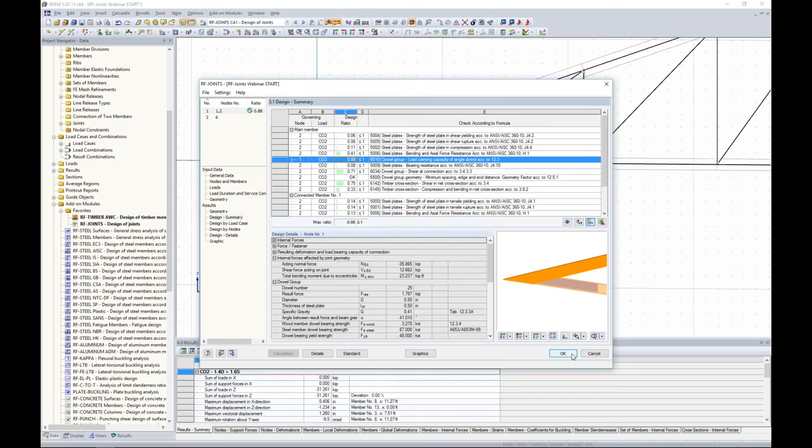Ideally, we want to go back into RF Joints. We can go to add-on modules, current module, and rerun our calculation for both connections, because our internal forces slightly changed now that we're taking into account the true stiffness. It looks like our code check is at 0.88, a little higher, but we're still okay in terms of our design. We'd want to run the design for node number 6 as well. So again, a pretty powerful feature if you want to truly take into account the stiffness and geometry of that connection back in your model.

Now, the last thing I want to show you before wrapping up the webinar is tapered and glulam members. The reason I'm only spending a couple minutes on this is because it really doesn't vary too much from the design we've already done, so not much time needs to be spent on it. But I do get asked quite often: how does your program handle tapered and curved glulam members?

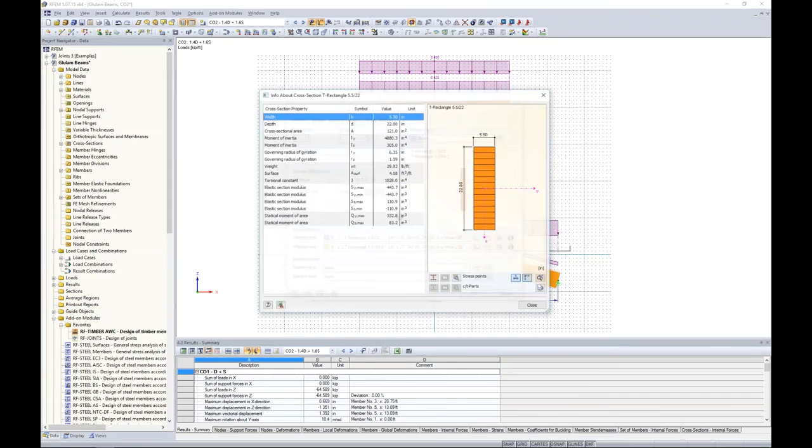Well, you can see our first member here is just a simple tapered member, and how we define a taper is 2 different cross sections at the start and at the end. A pretty deep member we're looking at here — 22 inches in depth at the start, and at the end we have a depth of 49.5 inches. Again, it's assigned as a glulam material, so the program automatically recognizes that.

As far as the curved member, these are 4 different beam elements. So again, I created a set of members so I can do design for this entire beam as a whole rather than each individual member.

Now jumping into the RF Timber AWC, I've already created 2 separate cases. The first is tapered glulam, so I'm only doing design of my member number 1 for the first case. Then under the second case, curved glulam, I'm doing design of my set number 1. You'll also notice I'm running LRFD for my curved member, but my tapered member I'm running ASD — so you can even run different design methods within the program if you'd like to.

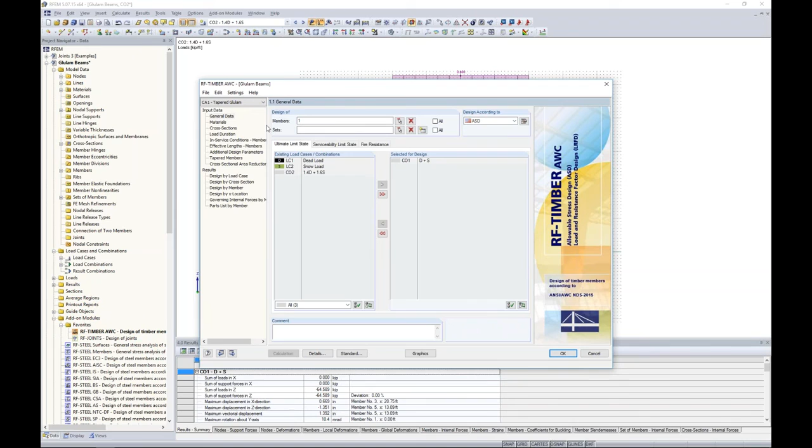So there are 2 distinctions with curved and tapered glulams compared to our straight, typical members we did before. The first is under load duration — you'll notice we now have a loading condition for radial stress design. Using the drop-down box, we have two options: other types of loading, or wind or earthquake loading. This comes from table 5.2.8 in the code, and for tapered members it's important because it's needed for stress interaction factors from 5.3.9. So you can specify that type of loading here.

Now the other thing is that a new table was automatically created because the program recognized this is a tapered member, called 1.10 tapered members. It simply shows the cross-section at the start, cross-section at the end, the length is automatically brought in, as well as the angle of the taper. Now there is one thing we do need to specify, and that's just the grain parallel to edge.

Now there are cases, such as if a beam is in uplift or maybe a cantilever, or anything of the sort, where you can use your engineering judgment to change this to something otherwise. Now as far as the design, we can jump down to design by member. Really not much is different, of course, other than our code references.

If we take a look at some of the code references here, you'll see equations from chapter 5. This is the glulam chapter in reference to tapered and curved glulams as well, and the program just automatically does those checks for us.

Now the other thing to jump to is the curved glulam. Again, two differences: load duration, and again we have the radial stress design. This is a little bit more significant for curved members, for the radial tension stress capacity.

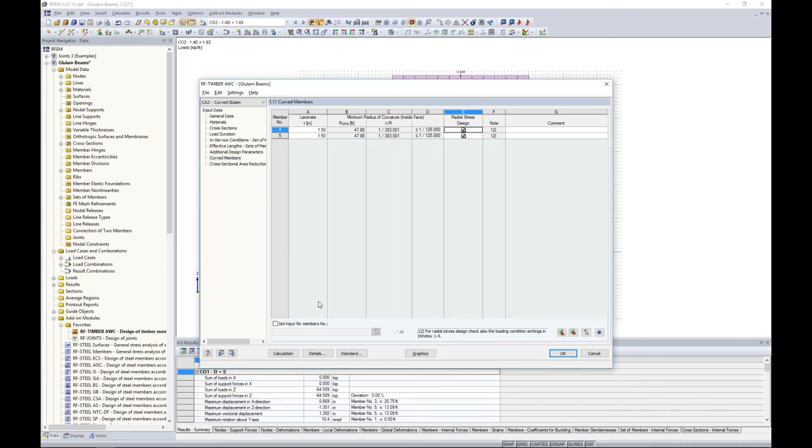Again, running the calculation here quickly, nothing is different in terms of taking a look at our results tables, other than our code references to Chapter 5 for the glulam members.

So with that said, you can see I just quickly flew through that, but the reason why is really not much changes, and the program pretty much automatically detects these types of members and will kind of point you in the right direction for your user input.